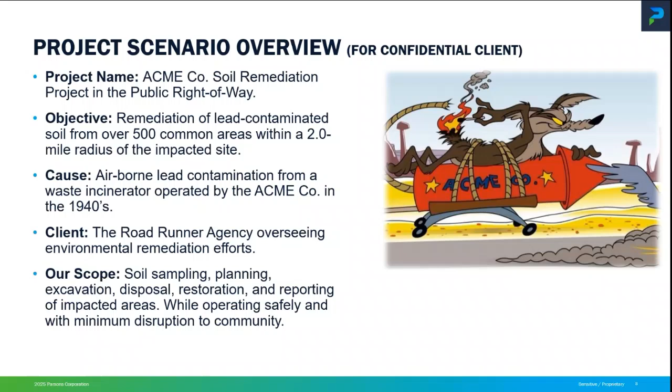And the Road Runner Agency is our client, charged with overseeing this environmental remediation. And our scope really is to perform the work of soil sampling, planning, the excavation, possible disposal, restoration, and of course, reporting. But we always have to keep in mind both the safety aspect and minimum disruption to the community. So these tools are being used for that purpose, to have our work done accurately, correctly, repeatedly, and prevent disruption to the community.

So I'm going to set up how this basic project is organized here. We've got these right-of-way common areas, which we call the RDU, the Remedial Decision Unit. It's inside a street segment. But the complication, of course, is to know how deep you need to excavate. And even if you were told to excavate to a certain depth, you've got a number of obstacles in your way, such as trees, tree trunks, roots, electrical poles, underground utilities. And so those may prevent you from reaching optimal depth. And so we want to be able to accurately report that.

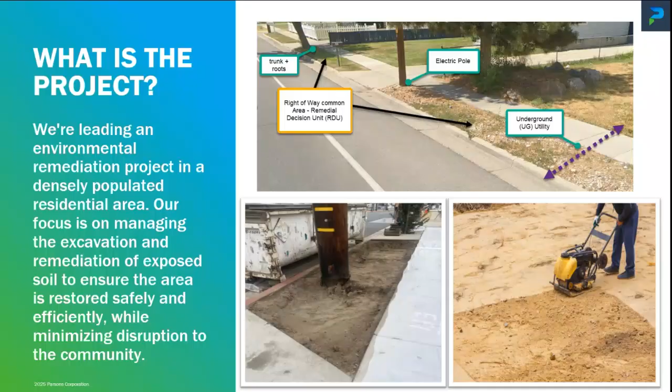At the same time, we're looking for opportunities to prevent disruption to the community, and that is because we're exposing soil which has some kind of analyte, probably lead. That's why we're cleaning it up, and we don't want that to become airborne again. And so we have a number of air quality monitoring, and that's another aspect of the data management of it. We may also have a school zone, or we're taking up valuable parking spots, possibly, or bike lanes on the street. So we want to minimize that. We want to get in there, and get out of there as quick as we can.

So again, our management of this project is really centered around these remedial decision units. We'll just use RDU. And here is a scenario of a street segment between two major streets, or however we broke it, and the remedial units. And sometimes these remedial units, you might end up discovering an extra one, or needing to subdivide them, as we'll show later in the presentation. But all of that has to be documented so that we can follow that and we can communicate between us.

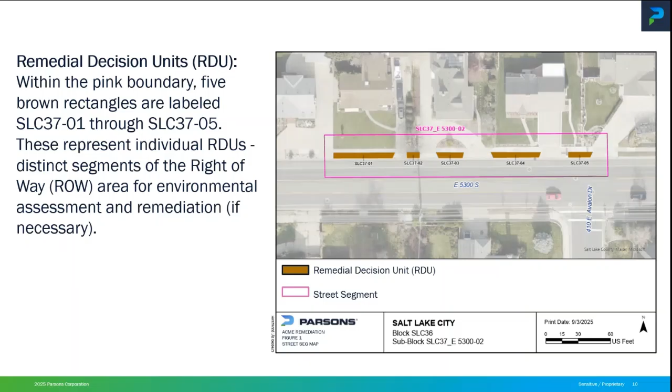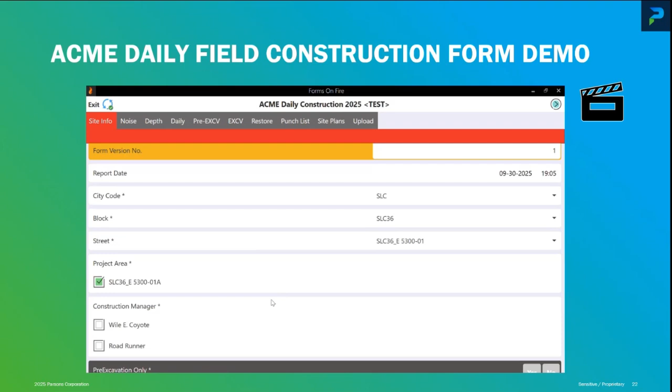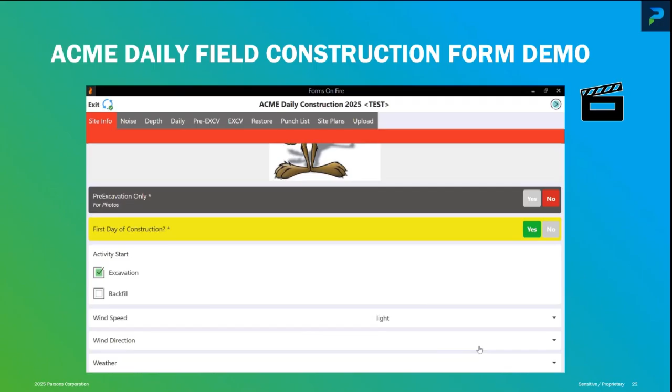All right, so what you can see here right now is these pick list options being pre-selected. They're filtered based off the data source that I'm selecting here. I'm selecting my user, Wile E. Coyote. For expediency, we're not doing a lot of different parts of the form. So no pre-excavation. We're doing excavation for our first day of construction. And usually on our intro of our Forms on Fire, we do a lot of site conditions. Some fields are not required, so you can skip if not necessary.

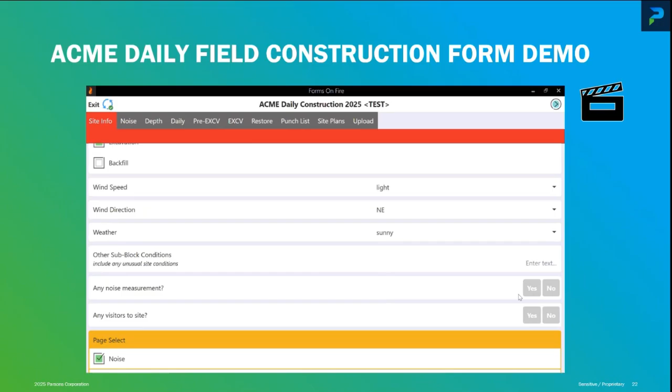I'm not going to be taking any noise measurements today, so you can see tabs start to go away. This is also a nice feature, so we can go through here and you see I start deselecting pages within the form, and we're limiting down to just our depth verification and upload pages. So here's a table. We're going to open up this table and we're going to select our RDU.

And here you can see we're going to write in a location description within our RDU. We're going to say we got to 6 inches. We didn't get to our full 18 inches. And we're going to list a reason why. Tree roots. We didn't collect a sample today. Typically we would, but this is just for expediency.

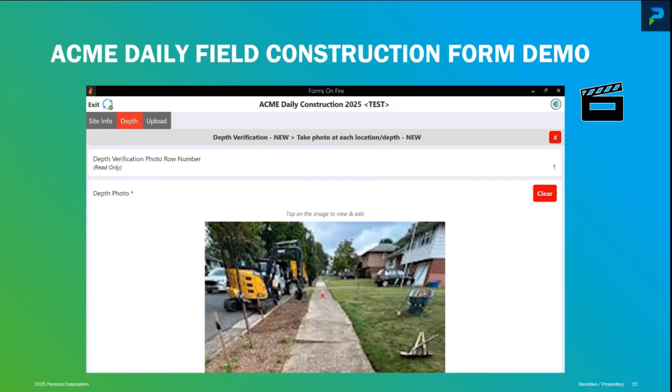And now we're going to choose some photos. Now on your phone, you would be selecting from your photo library, but this is done over the computer. All right, so you can see in the photo, we've got a watermark. We've got 1.1, that's for our row and for our first photo taken, and you can see a date and timestamp included. And now we're just writing in a little description of what's being captured here.

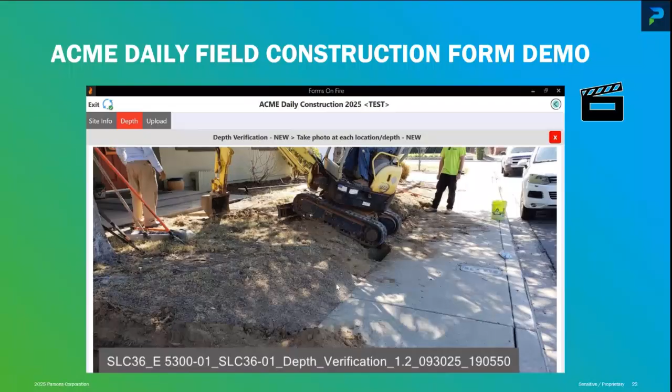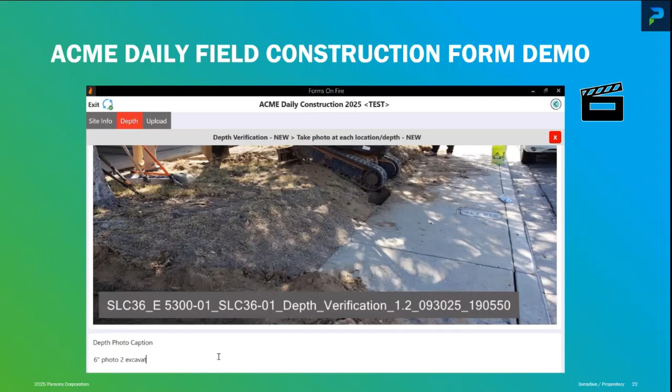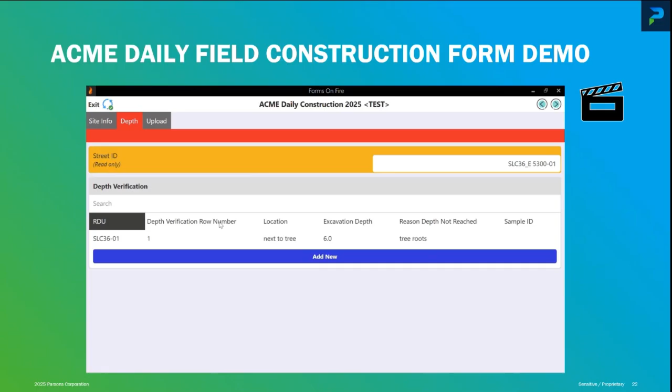And we're going to take a second photo, include that as well. And now we've got 1.2, so our 6-inch depth information, our second photo with that information, and a little caption. All right, so we're backing out. We've got our 2 rows there, and we've got our 1 row. So that was a table within a table. You can see no sample ID was collected, so that's blank in that column before.

All right, and now we're marking it's not our last day of construction, so we're not completing any of our activities. We're not doing any restoration today, but we do need to clean up before we leave. So we're gonna mark down these notes. We're reporting a deviation. School was let out early. So they were let out at noon and we had to shut down. And there's no exposure of contaminants, no health or safety issues to report, and we excavated 3.2 tons of soil.

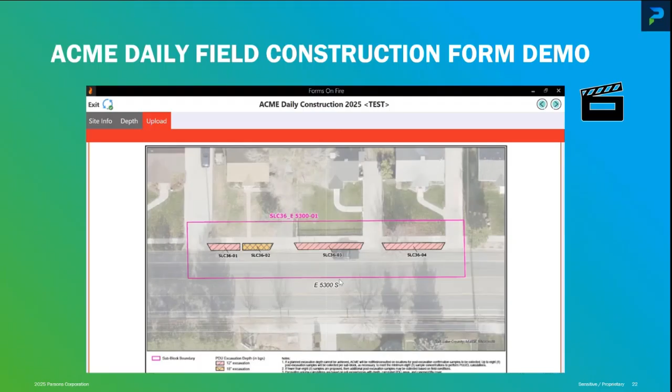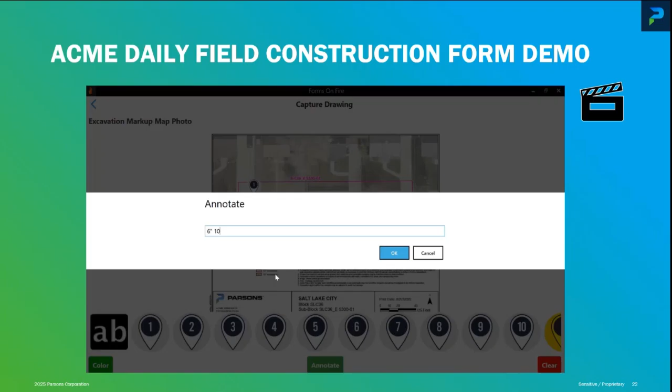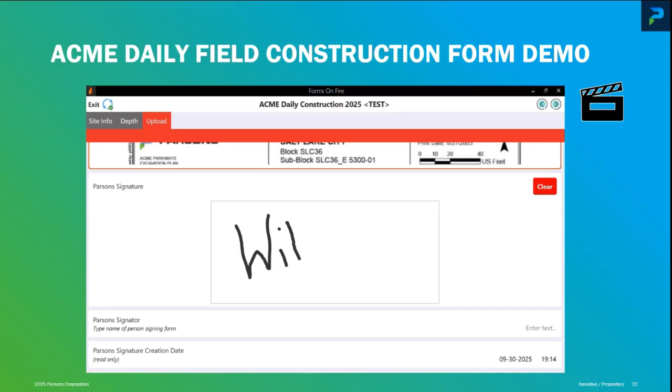All right, now we're going to get to our markup maps. We're going to pull in some of Rob's lovely GIS, and we're going to make some annotations. So where we excavated, we're going to place a little marker on the RDU, and we're going to add our note, 6 inches and the date. And it's nice and legible. So we can back out here. We'll sign off on our work and add a name in case that signature is not legible.

And you can see where we've clicked submit now. And we're going to refresh the page here. And you can see this has wound up in our SharePoint list. So here's your map ready to go. That's within seconds. And here's our other location. This is showcasing the photos that we took earlier. So this has got all our information within the list, and it's got our photos captured.

All right, that's it for me. I'm going to pass it off to Rob to further discuss geographic information systems for this project. Awesome. Thanks, Parker. Really appreciate that. Hey, everyone, I'm Rob Cushing. So I'm going to review the GIS mapping and visualization section of the project.

So as Yoav had mentioned earlier, we're utilizing a GIS enterprise system, and we've got several advantages of why we use that. Number one is we have centralized data management. So all the spatial and attribute data is stored in this centralized enterprise geodatabase, whether it's SQL Server or Oracle, for example. And it also reduces any type of data duplication and inconsistencies. Another advantage is multi-user collaboration. This will allow multiple users to work on the same data set simultaneously. And also it allows versioning, which tracks any kind of edits and conflicts that might be encountered from two different analysts maybe working on two different street segments.

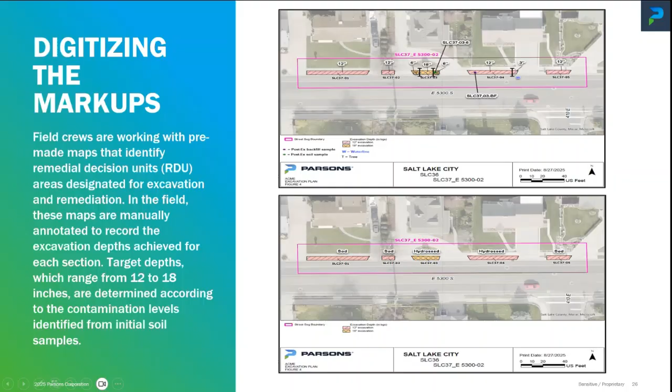So we have our depth status, our as-built depth, what was actually achieved in the field, a depth confirmation, did it actually achieve the required depth that we were going for, and then also the restoration type, whether it's sod, hydroseed, gravel, or some other type of material.

Then we're going to digitize our soil samples, which are also annotated on the markup. Those are going to be marked showing where the approximate locations are. And then we have a naming convention that we're going to follow, such as the street, RDU, and then depth. And then we also have attributes for those point features that we want to attribute as well and have that stored.

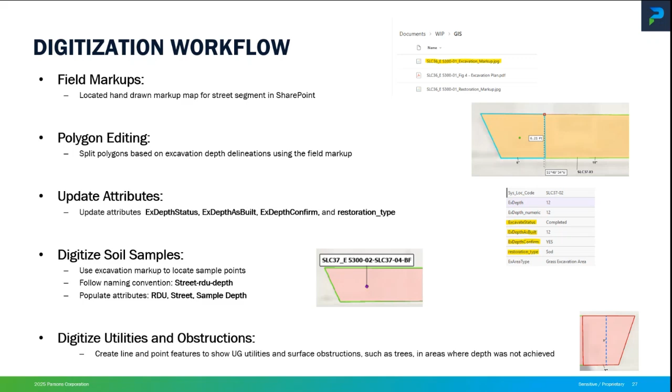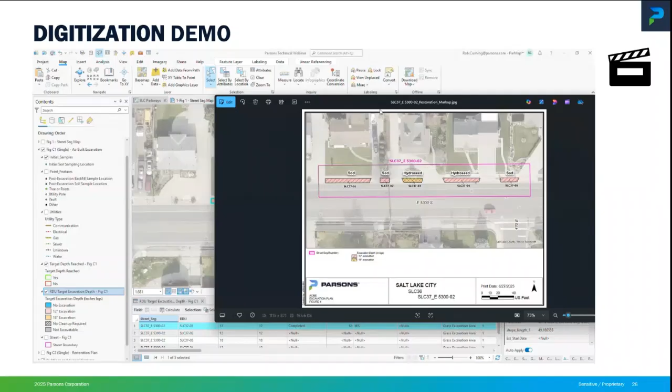So we're going to go through a quick demonstration video here showing how our workflow goes. So you can see we're first referencing our markup for this first RDU, and it was marked at 12 inches without any type of obstructions. And then we also have our markup for the restoration indicating that this RDU was planned to be restored as sod. And we're going to move to our next one.

And we're going to mark it complete. Once again, we're referencing our markup, usually on the other screen. And we're going to mark this one as sod as well. Save that. Let's move on to our third.

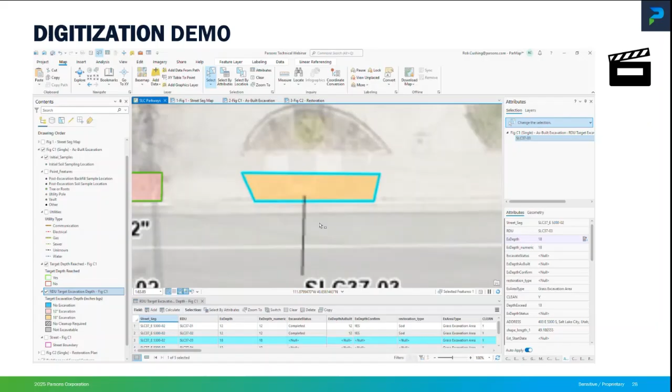So this one is a little bit more complicated. Looks like we had 2 trees on either side of this RDU, so we're going to split this polygon into 3 separate sections and then attribute that accordingly. So we'll get that split using our markup, showing where those delineations were. And we'll start attributing this section, mark it complete.

So it was only 6 inches. We're going to mark no for depth confirmation because of roots. And this RDU is planned to be restored with hydroseed. So we'll mark that as hydroseed. Move on to our next section. So our middle section did not have any obstructions. Field team was able to achieve 18 inches.

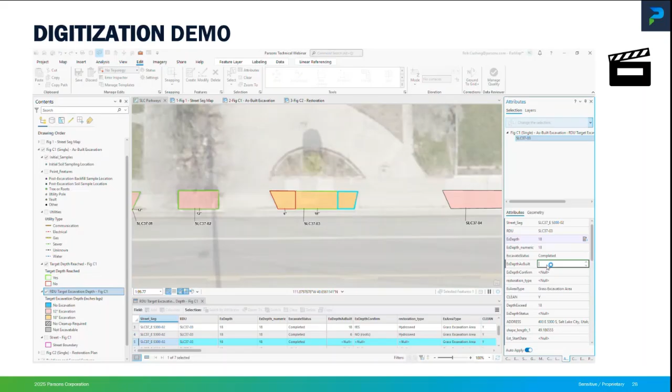We'll mark that yes. You can also see how we have our template set up. We have another additional layer that really helps identify where sections were, where they did meet depth and where they did not meet depth, whether highlighted in green or red.

So we're going to move on to our 4th RDU. So we had an obstruction according to the markup on the far right-hand side where it looks like they encountered a water line. So we're going to split our polygon here.

And we'll start attributing our larger section, which did reach our target depth of 12 inches. We're going to mark that yes. And we're going to double check our restoration markup. And this one is scheduled for hydroseed. So we'll attribute that and mark this one complete.

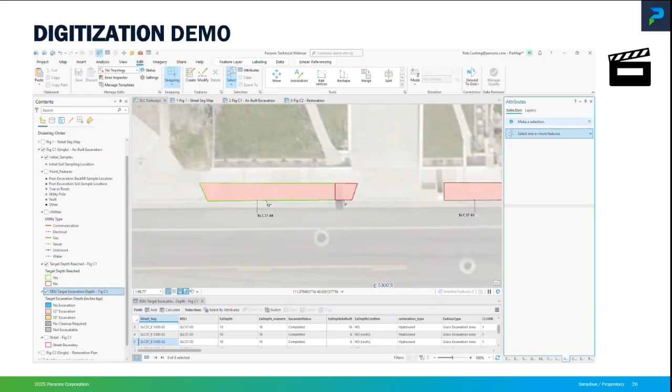Looks like it was a 3-inch depth because of that utility line. So we're going to mark no because of utility. Attribute that accordingly. And our final RDU. We didn't have any obstructions on this one, so we'll just attribute this at our target depth, 12 inches. Mark that yes. And our restoration as sod. Save that.

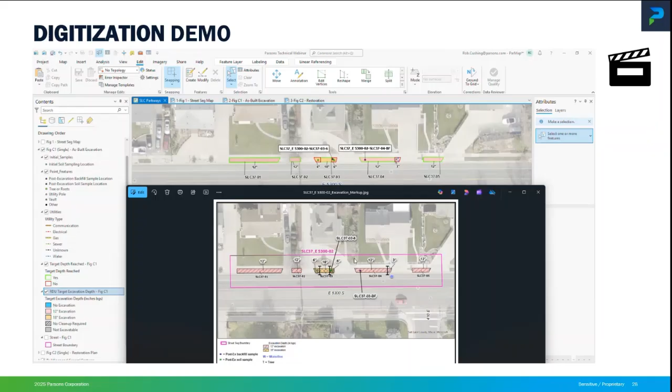And now we'll be ready to save. I saved the utilities. We can also see how we're digitizing our utilities as well. We got a tree there. We're going to show the markup, kind of do a quick comparison, make sure that we've got everything that's shown on that markup. We have everything digitized in GIS here.

So a few key considerations to keep in mind are a couple of challenges that we encounter. Sometimes we can have incomplete or unclear delineations and excavation markups. Sometimes these are handwritten, so sometimes it can be difficult to read handwriting, or perhaps something wasn't clearly delineated. Sometimes you can have discrepancies between the field photos and markups. Maybe when they were filling out the forms on Forms on Fire, they picked the wrong image and uploaded that for a neighboring RDU or neighboring section.

But great tips for success: use our daily construction depth verification tables for context. So for each section, if you're not sure if what they wrote down was a 3 or an 8, you can always verify with our tables on SharePoint that will clearly show what depth was typed in to Forms on Fire. And then also we can collaborate with the field teams when necessary if we have some type of discrepancy that we need to verify.

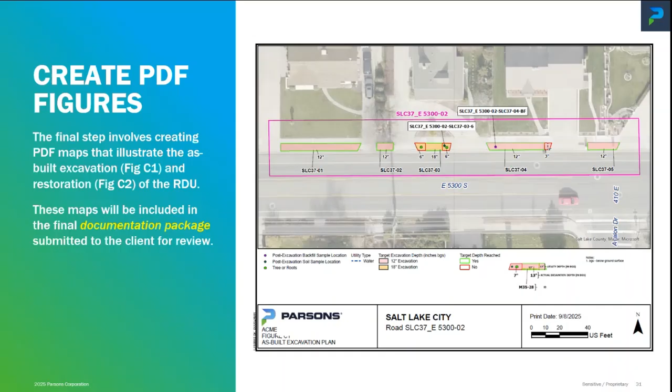So now a quick overview of the visualization process. Now that we have everything digitized, we want to create those final figure maps that are going to be used for documentation. Here's a quick example of our final product. We want to create these for our figure 1, figure C1 and figure C2, one figure showing excavation and another one showing restoration. I've got a quick demonstration video here going through that process.

So also with our ArcGIS Pro, we've got pre-created layouts that are templates. That way everything's consistent across the board. If we have several different analysts creating these, everybody's using the same template, so everything's going to be created consistently. Another great thing, we have a map series set up here. It's really beneficial when we have all of our layers and groups set up.

We can run our map series, which will auto query and filter our street segments and zoom into our maps for easy exporting. So you can see here, we're going to click our sub block or our street segment. We're going to export that to PDF. And then finally, we're going to create our restoration figure C2 PDF map.

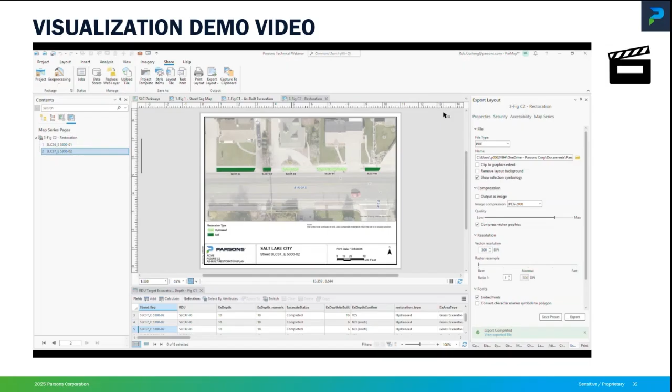So we've got different groups set up for our relevant layers. Here's our restoration layers. We're going to run our map series, only showing our relevant street segments, and we'll export that to PDF. And then after we get everything exported, it's always good to do a quick QA/QC, make sure everything was exported as we would expect. Review each of our PDFs. Make sure everything's legible, minimizing any mistypes or labels overlapping one another. Make sure everything's nice and clean.

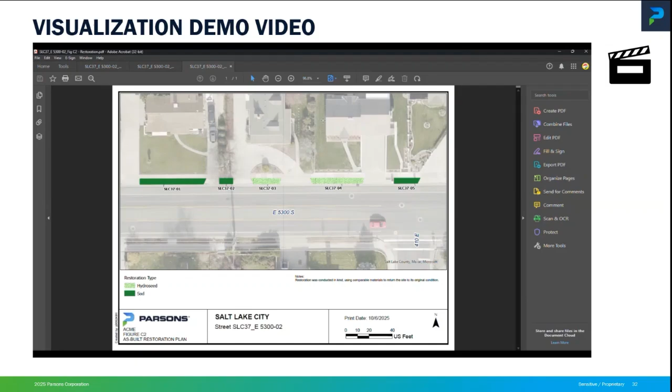So final adjustments to our legend. We always like to show relevant features that are shown on the map, so make sure that the legend's reflecting what's actually visible on the map. If that particular RDU did not have a utility pole that was encountered, we don't want to show that on the legend. Labels, we also want to make sure they're clear and aligned correctly. Sometimes these can get complicated and you can have labels crisscrossing or on top of one another, so we want to make sure that's nice and clean.

And then we have our features. We are exporting our figures that we were just demonstrating. And then after that, we'll have our SharePoint location for that particular street segment. We'll upload those figures that'll be used for the documentation packages.